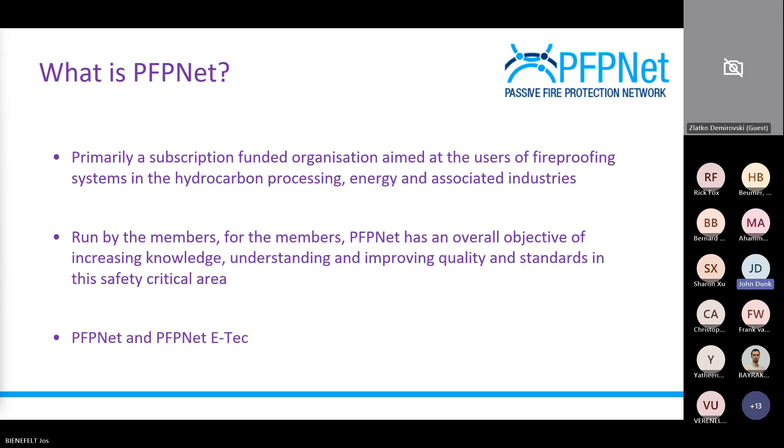Today's meeting is really to talk about tunnel fire protection. Some time ago, PFPNet recognized the severity of oil and gas fires compared to those that occur in tunnels, and we formed the Tunnel Fire Protection Group. This is currently chaired by Kees Both of ETEX. It's a small group within PFPNet, but one which is looking specifically at tunnel fire protection. So far, that group has developed several documents addressing fire protection in tunnels, the most recent of which is the guidance document we will be presenting throughout this webinar.

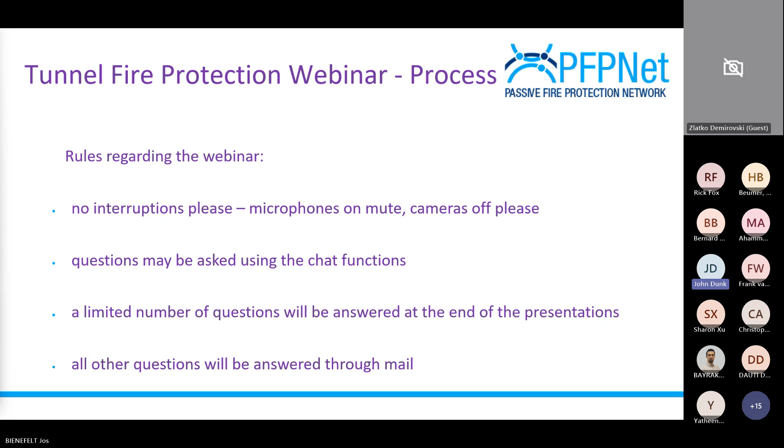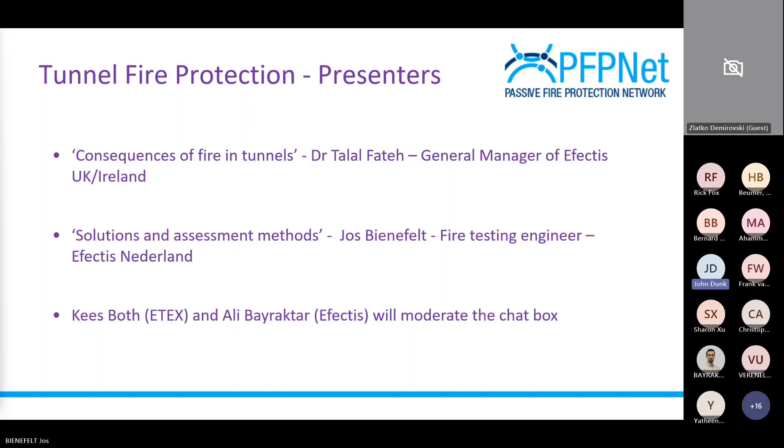So kicking off, we have consequences of fire in tunnels, which Talal's going to present. Then solutions and assessment methods, which Jos is going to present. Kees Both and Ali Bayraktar will be moderating the chat box, so those guys are going to be doing a good job for us today. Right, so that's me pretty much completed. We can go into the presentations if we want to start, please.

Good morning, everyone. My name is Talal Fateh. I am the manager of Efectis UK. Before starting the presentation today, I just want to take 5 minutes to present who Efectis is, what we are doing, and why we are here today.

20 years ago, the Dutch Public Research Center, TNO, with the French metallic construction company, CTICM, created a company named Efectis, dedicated to fire safety. We are based on our testing culture, so we try to test everything we can. However, testing is not enough, so you need to have a look at fire engineering and certification, including inspection and approval.

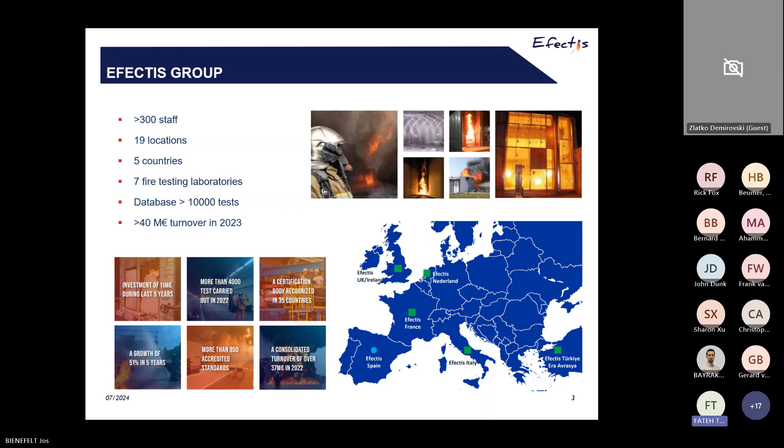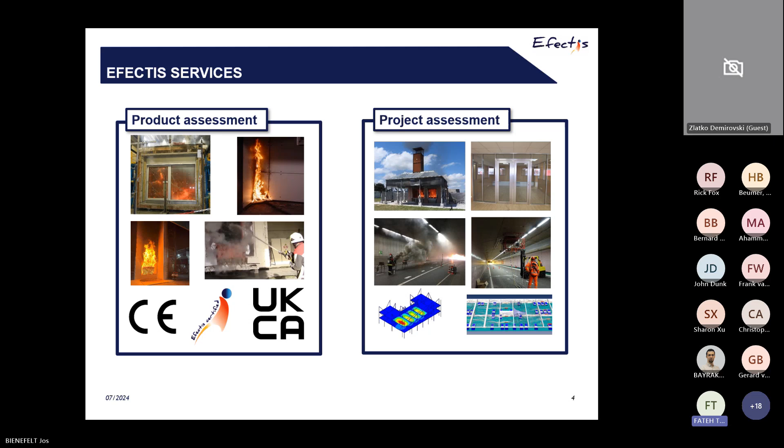To summarize our service, we are working at 2 different scales. The first one is the product scale, where we work with our client to assess the fire performance of the product and provide the relevant certification, such as but not limited to CE marking, UKCA, or our voluntary system Efectis Certified. However, we can also work at the project level, where we assist a system to understand the fire performance of a system in real life or in real application.

As I mentioned, we are a testing and fire engineering company. We cover reaction to fire, fire resistance. Sometimes we need to do special tests, which can be large scale or adapted tests. We are able to provide certification, and also work in fire engineering, and we have teams to cover inspection and expertise.

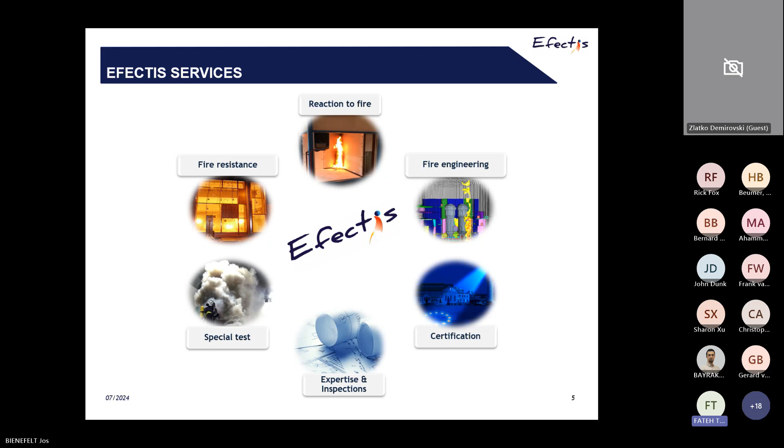As I mentioned, Efectis is dedicated to fire safety. However, our market is not limited to public buildings and high-rise buildings, but also we are working in nuclear plants, transport area, infrastructure, oil and gas.

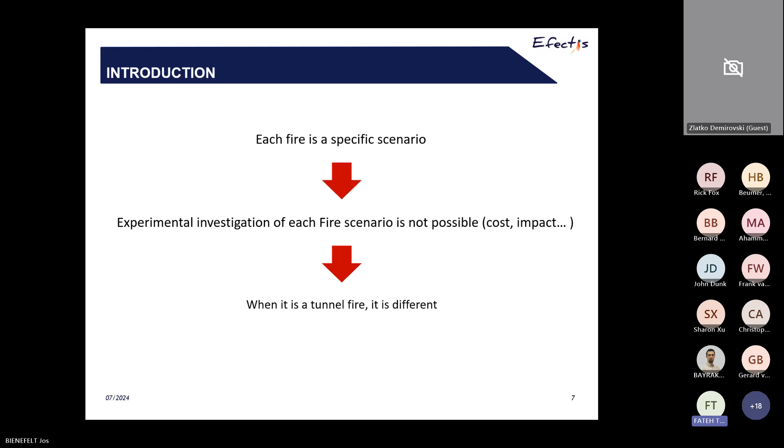If we would like now to come back to our topic, let us all agree that each fire is a specific scenario. We cannot, unfortunately, investigate every scenario. The problem today, if we are talking about the tunnel fire, I don't want to use the word complex. I will use the word different. Why is it different?

It's different because I have ventilation, oxygen is available. The location of the ignition can change across the tunnel. The dimension of the tunnel itself can be different from one to another. If we're talking about the fuel load, this can be a few megawatts if we have a fire started from a car, where it can be hundreds of megawatts when we are talking about a lorry or maybe petrol tanks.

We have several issues that can happen in the tunnel and only in the tunnel. For example, we can have backlayering, where the smoke stagnates at a certain level in the tunnel. We can have what we call the moving fire, if we are talking about a train that has a fire and that train keeps going ahead across the tunnel. And of course, the tunnel fire has consequences during the accident and after.

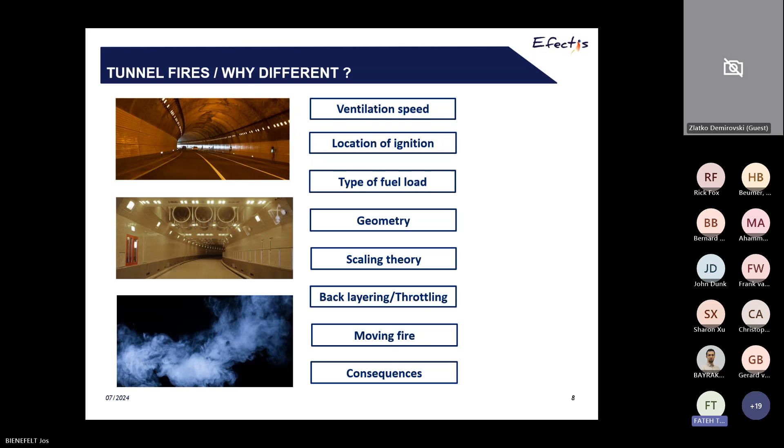So, to respect the time dedicated to me today, I will just select a few items to present the consequences we may have during a fire in the tunnel. I will try to present briefly a few items. Of course, you may have something extra, but the objective of today is not to cover all of them, just maybe to have a quick view of what can happen during this type of accident.

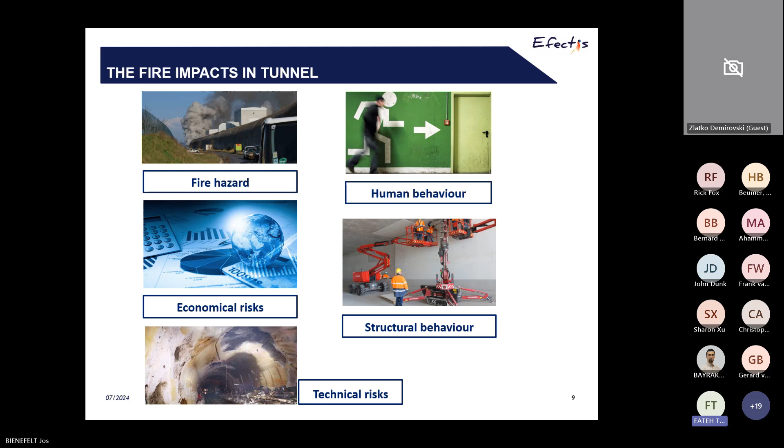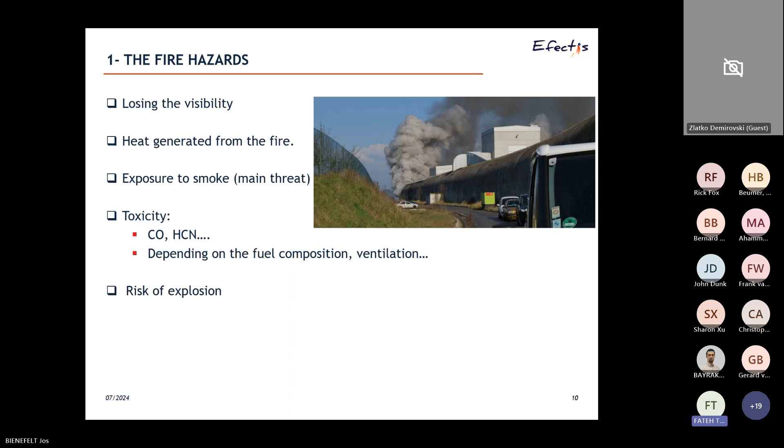So if we start with the hazard from the fire, as you can see in the picture, a fire in a tunnel will generate a lot of smoke and a lot of heat. As we know, smoke is toxic, and we know that a lot of gas is generated, such as CO, HCN, etc. But the gas itself can be different from fire to fire due to the variation of the scenario, like fuel and ventilation. And also we should not forget that we have, all the time, a risk of explosion.

One of the main issues we have in the tunnel is that we may need to evacuate a large number of people involved in the fire. The issue is that when we are doing a training or fire drill, the evacuation happens 100% successfully without any problem. The issue is that when we have a real fire scenario, we act differently. We will act differently when we are alone, and also we will act differently when we are in a group. This can lead to increased evacuation time.

Increasing the evacuation time may create more probability of having more accidents and injury, and increase the fatality of that accident. So we need to pay attention to how we evacuate all these people without having any problem. And sometimes the people themselves create another accident, or maybe enhance the fire to spread during the fire in the tunnel by doing the wrong things.

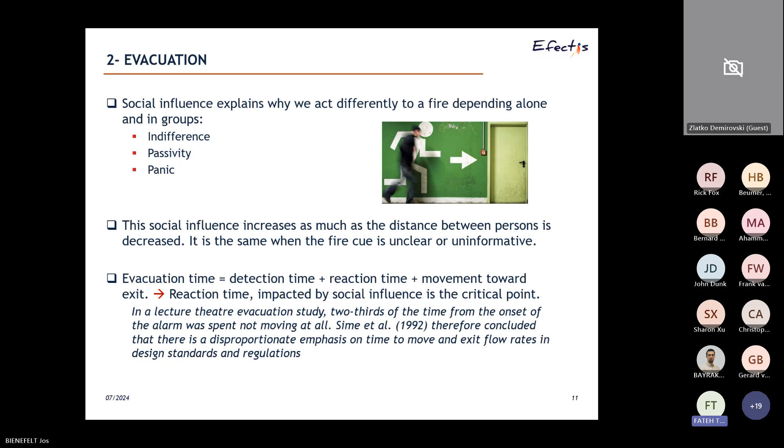Of course, a fire may lead to losing the power system in the tunnel or the surrounding area. What it means is we may lose the lighting, the ventilation, communication. And also we are losing the function of that tunnel. It can lead to significant traffic impact. And also we may need to close the tunnel, not only during the accident, but also we need more time to investigate and understand why this happened, and later a significant time to repair it.

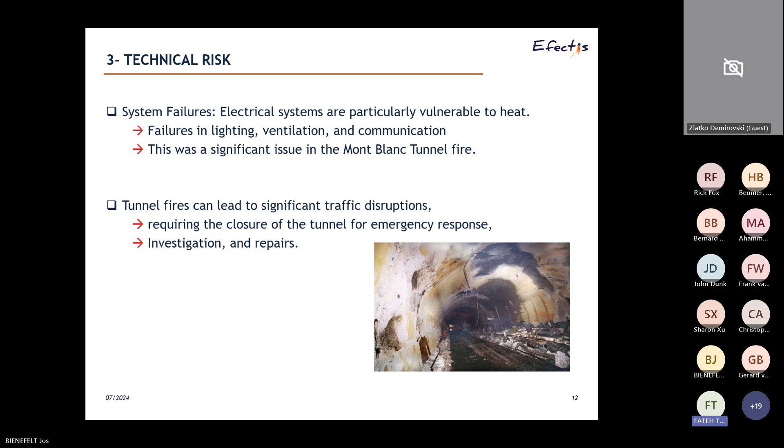So if I'm talking about the reparation, we can cover the economic cost, but also we should not forget that during the maintenance phase, we need another solution for our needs, so logistics can add an extra cost. We should not forget the environmental cost - we are talking about the pollution of the air and of the water. Sometimes when we have a lot of severe fires happen in the tunnel, people may lose confidence in the safety of the tunnel infrastructure.

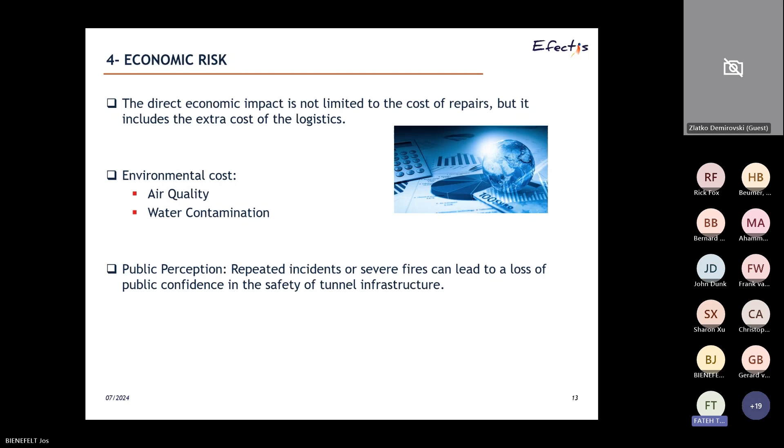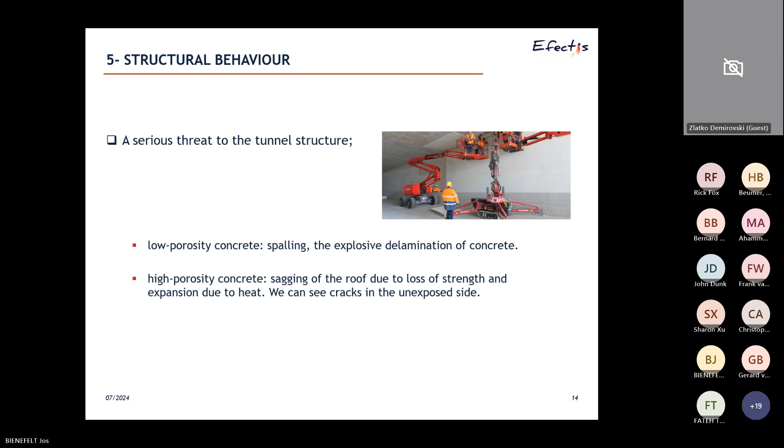And the most important thing is the damage to the structure of the tunnel. One of the main structural problems in a tunnel exposed to fire is the serious damage caused by explosive spalling of the concrete.

How can we reduce all these negative things happening? Of course, it's not limited to good design, good detection, enhanced maintenance, inspection, and training the staff of the management company that operates the tunnel, but also, as we are talking today, about passive fire protection.

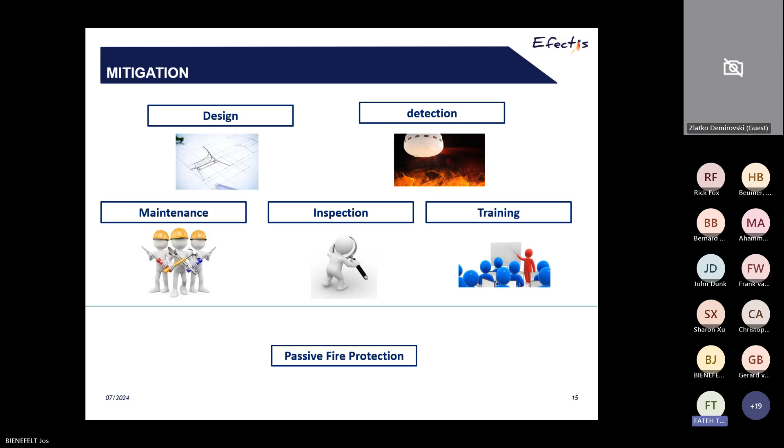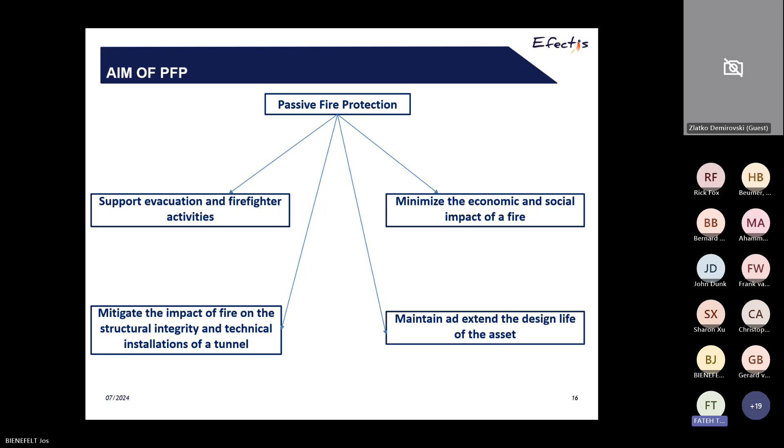So the next one, just... why passive fire protection? Because passive fire protection will support evacuation and firefighting activities, and also will reduce the impact of the fire on the structure, and protect the technical installations of the tunnel. This leads to minimizing the economy and cost of the fire, and gives us more life cycle for the assets.

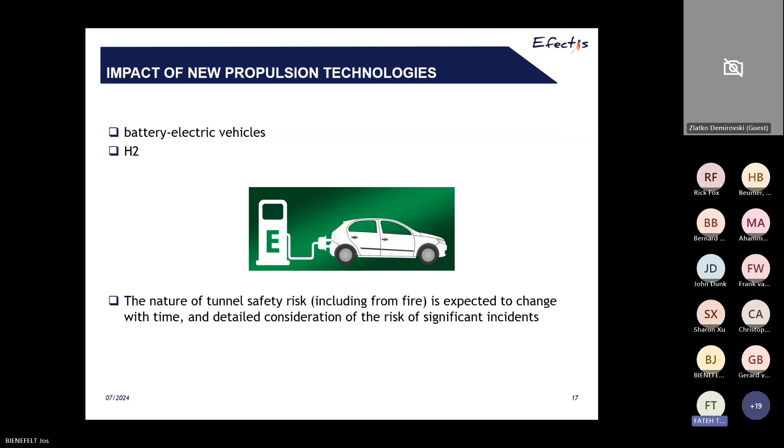Before passing the presentation to my colleague, I would like to raise another issue coming from new technology - today we are talking about hydrogen and batteries, and more complex designs in tunnels. All of this is changing the safety risk, including fire risk in tunnels, and this needs to be considered in any further investigation. I hope I respected my 10 minutes - sorry if I used more. So I will leave it for you now. Thanks.

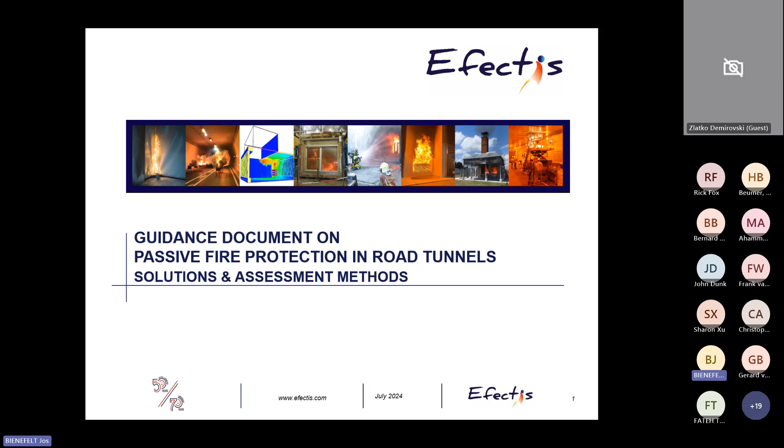My name is Jos Bienefelt, and I'm a project leader at Efectis, the fire engineering department. My main involvement is in fire resistance of concrete structures, mainly tunnels, and also protection of these concrete structures. I'm a co-author and editor of the Efectis R0695 procedure for testing of tunnel linings. I'm also co-author of the guidance document. This is my email address and telephone number.

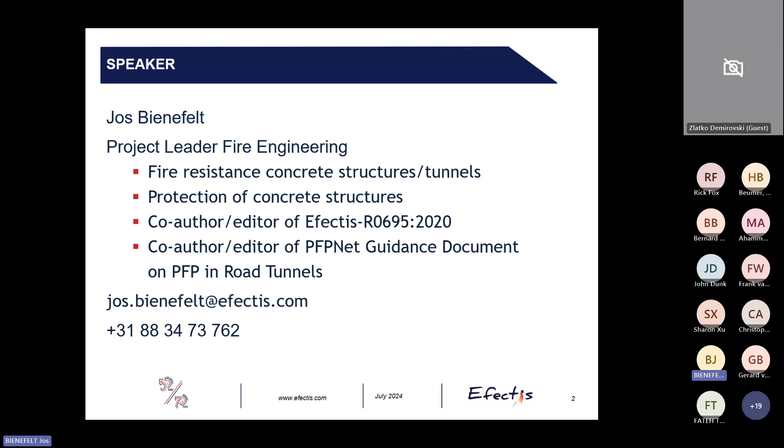The intent of the guidance document is to give a primer for those not familiar with PFP in road tunnels. For PFPNet, the interests are that tunnel fires are severe and similar to industrial fires - fires that other PFP members are familiar with. And the hazards are also becoming more similar, for instance hydrogen and batteries.

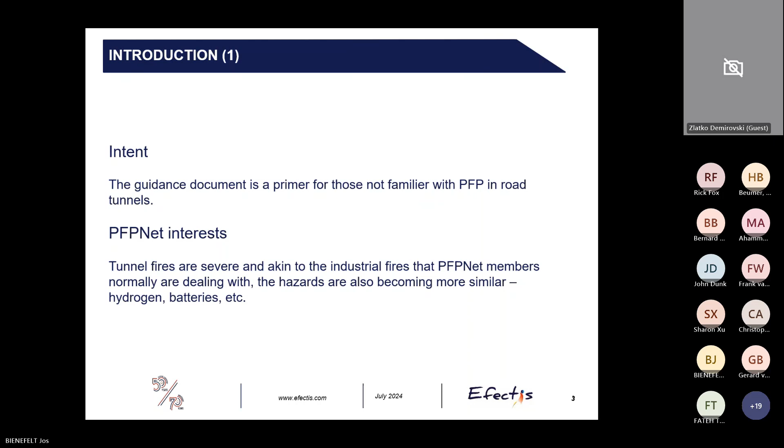The scope of the guidance document is at the moment only road tunnels, but other tunnels are also considered for future developments, for instance rail tunnels. The focus is mainly on tunnels made of concrete, but part of the document may also be applicable to other building materials. The focus is also on protecting the main load-bearing structure of the tunnel, and focuses on added-on PFP. Only legislation from the UK, France, and the Netherlands is included in the guidance document.

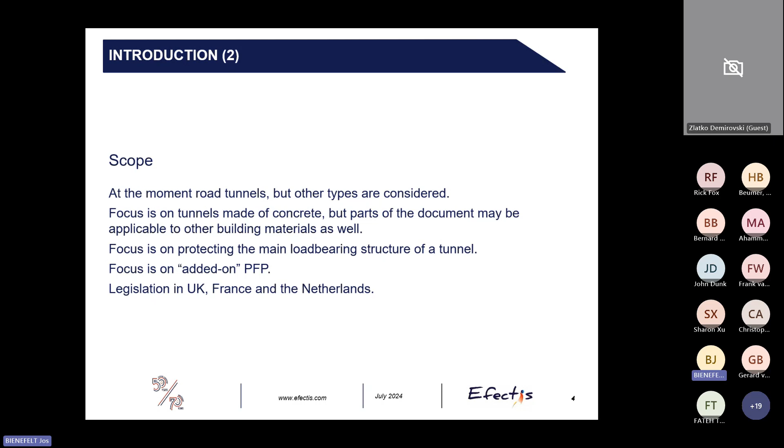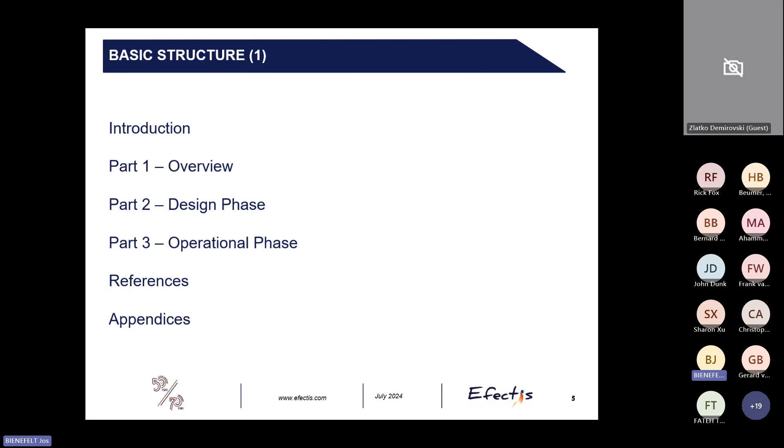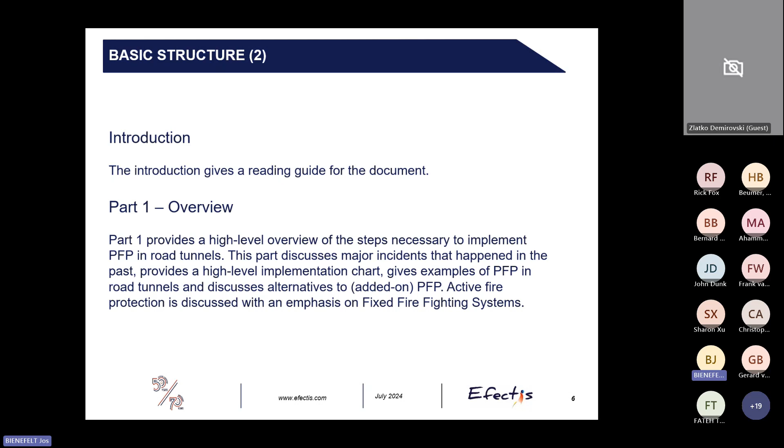In part one, overview, a high-level overview is given of the steps necessary to implement passive fire protection in road tunnels. It discusses major incidents, gives a high-level implementation chart, gives examples of PFP, discusses alternatives, and also discusses active fire protection with an emphasis on fixed firefighting systems.

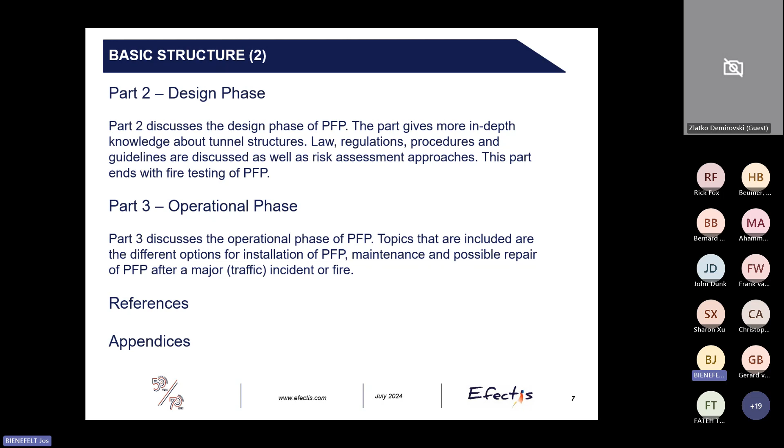Part 2, design phase, discusses the design of PFP, gives more in-depth knowledge about tunnel structures, relevant regulations, procedures and guidelines, as well as risk assessment approaches, and this section ends with testing of passive fire protection. In part 3, the operational phase is discussed, which includes installation, maintenance, and possible repair.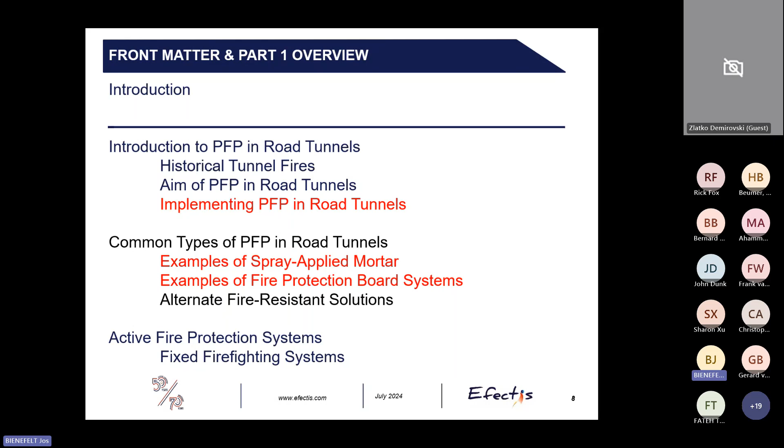So for this webinar, I will focus only on implementing PFP and examples of passive fire protection in tunnels from part 1. So let's start with implementing passive fire protection.

This is the implementation chart we've made, with 7 steps you should take for implementing passive fire protection in road tunnels. It starts off with identifying key tunnel characteristics, for instance if it's a tunnel under open water or only a land tunnel.

The next step would be to check relevant law and regulations. The next step is to perform a risk assessment study, and based on the risk assessment study, a fire protection system can be chosen. That system has, of course, to be tested for conformity, and if it fails, then you are back to step 4.

Well, if a system has been chosen and it conforms to the specs, you can go to installation, and after that, of course, maintenance.

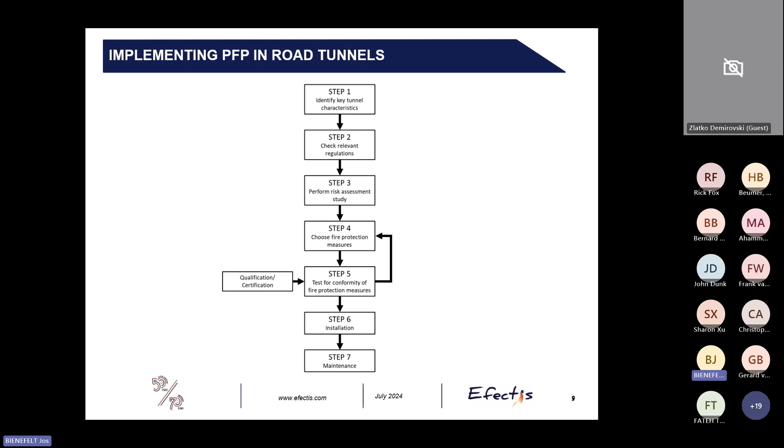Now I want to discuss the most common types of passive fire protection used in road tunnels. Mainly two types exist: based on spray applied mortar or based on fire-resistant boards. At the time of writing this guidance document, I'm not familiar with intumescent coatings in use in tunnels, however I know that developments are being made.

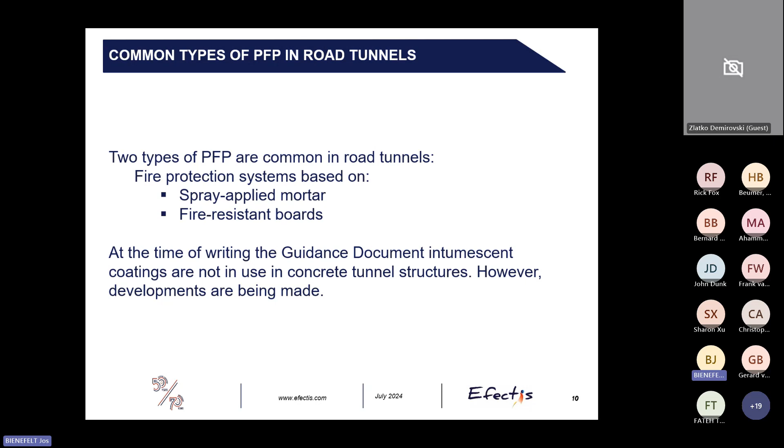All right, so let's start off with an example of spray applied mortar. This is a picture of spray... sorry, we'll continue. So this is an example of spray applied mortar in a tunnel. You can see here it's applied to the wall, but it's also applied to these beams on the ceiling.

The beams on the ceiling still have the rough surface that shows after applying the spray applied mortar, but on the wall it's nicely troweled to cut down the unevenness and give it a smooth appearance, and it was also painted.

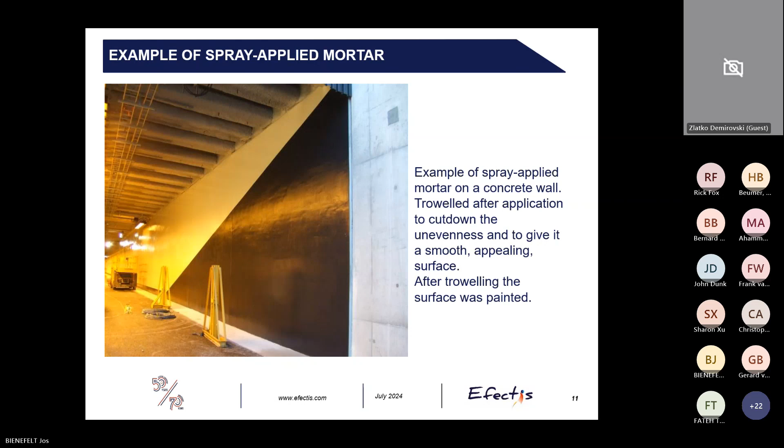This is a basic system in that the joints are butted together and it's placed directly against the concrete. Such a system can also be painted to make it more appealing.

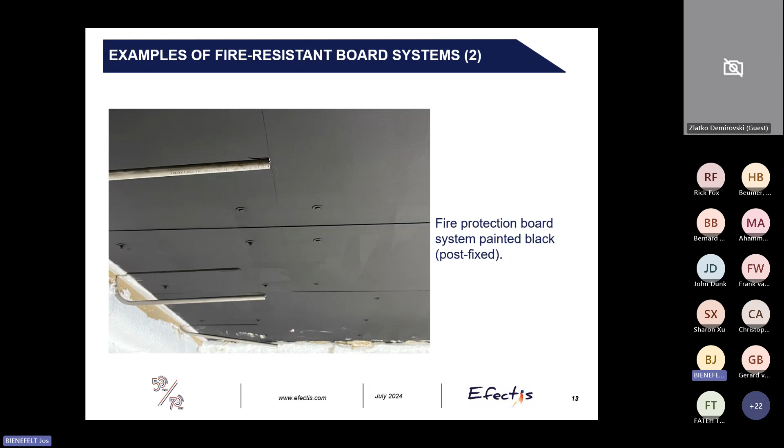The board system may also be applied to a bored tunnel segment, as used for TBM tunnels. In this case, a faceted system is used, so boards with a small width are used, and this system is also placed at the joints on backing strips, and it's also attached with stainless steel anchors.

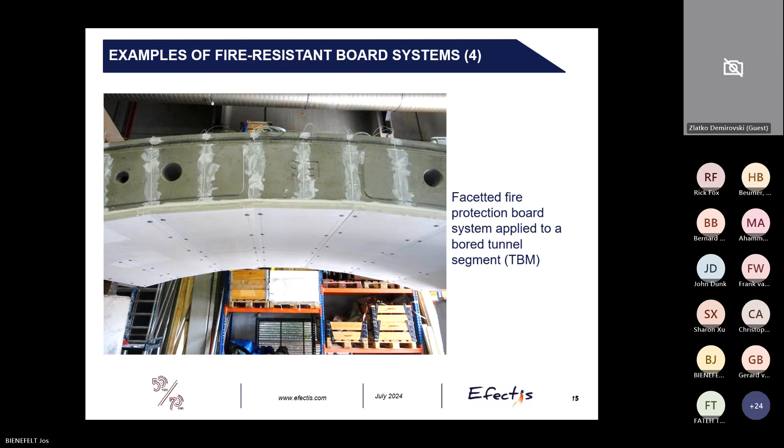Another variety you see in practice is that the fire protection boards are installed onto a steel structure. In this case, because the back of the board is not in touch with the concrete, it doesn't work as a heat sink, so these boards are usually quite hot at the back during fire. As a consequence, sometimes a thicker board is used in practice.

So now we will continue with part 2, the design phase, and for this webinar I will be discussing testing of passive fire protection.

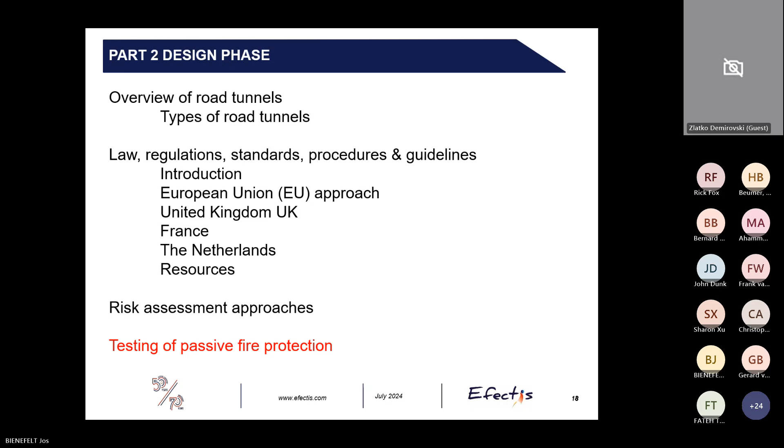So testing may be divided into the following tests: reaction to fire tests, which are a main concern in the beginning stages of a fire; fire resistance tests; and other tests such as frost-thaw cycle tests, fluctuating air pressure tests, and tests to check resistance to chemically aggressive environments. Exposure and aging tests are also mentioned in these EAD documents.

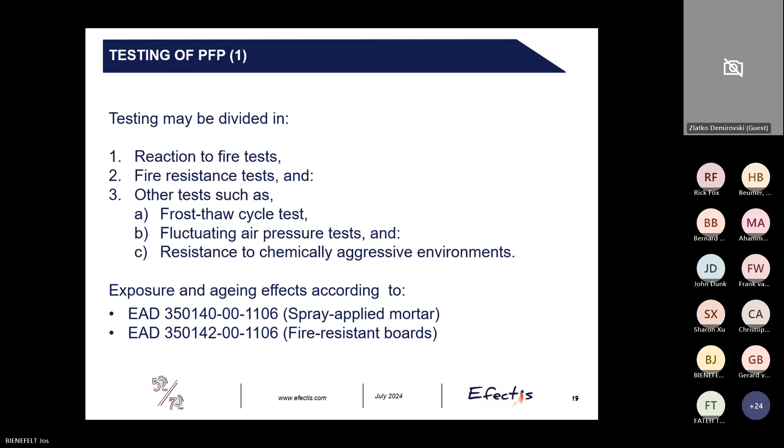On the European level, there's no harmonized fire resistance testing standard or classification system for passive fire protection in road tunnels, in other words, testing at the high temperatures expected in the most severe tunnel fires. So every country arranges this on a national level, and the guidance document describes the procedures for France and the Netherlands, since there's no specific UK procedure at this moment.

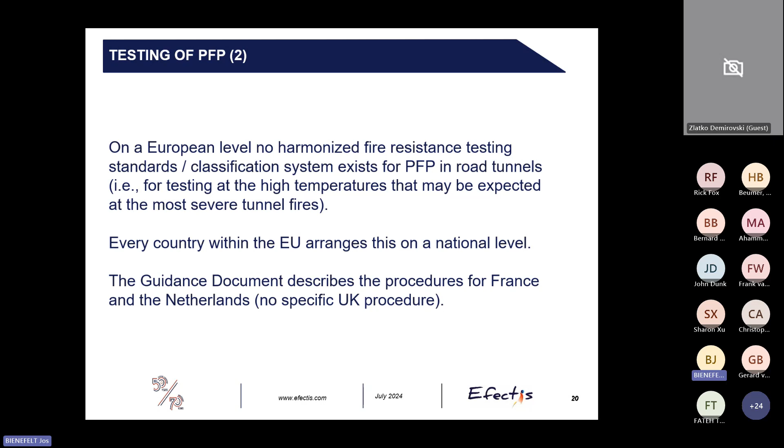But before we go there, let's check the most common fire curves. For buildings, the ISO 834 standard curve is normally used. Comparing that to curves used in tunnels, for instance the RWS fire curve, we see a much higher peak temperature of 1350 degrees Celsius. Also importantly, tunnel fire curves rapidly rise in temperature in the beginning stages; for instance, the RWS fire curve reaches more than 1100 degrees Celsius within 5 minutes. That has a big impact on the concrete tunnel structure, and because of the rapid rise, it might induce fire-induced spalling.

So in the Netherlands, the RWS fire curve is used. In France, the HCM fire curve is used. And I've also included two other fire curves that come from Germany, the RABT 30 and RABT 60 fire curves.

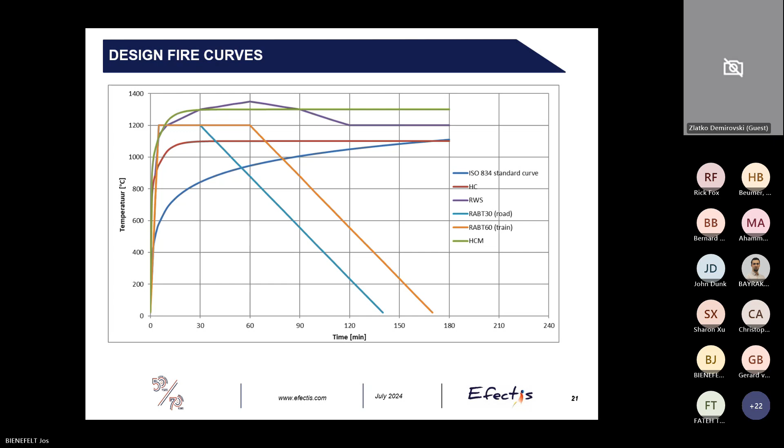So testing fire protection, passive fire protection in France. The demand there is A2S1D0 for reaction to fire.

And for determining the fire resistance, CETU has published a guide called Passive Fire Protection Systems, Justification of Performance for Road Tunnel Structures. If you Google this, you can find it on the website of CETU and download it for free.

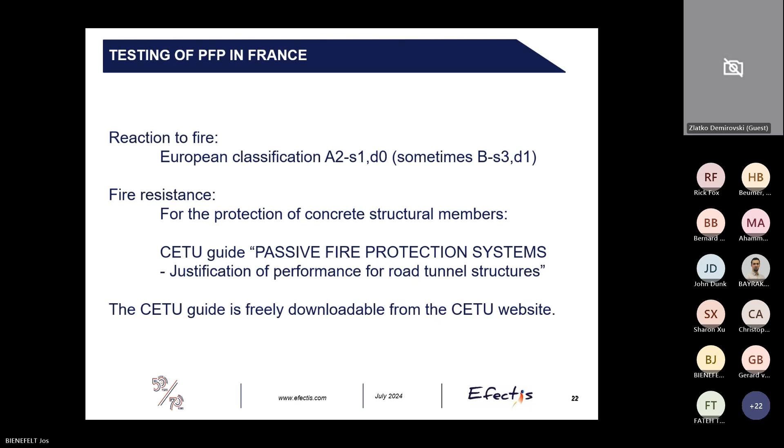The CETU test is actually based on a European test standard, EN 13381-3, but it substitutes the standard fire curve for the HCM fire curve. And it describes more instrumentation than the European standard.

So the CETU guide only describes a method to determine the characteristics of passive fire protection, but it doesn't focus on the spalling properties or other fire properties of the concrete structure. Those are not considered.

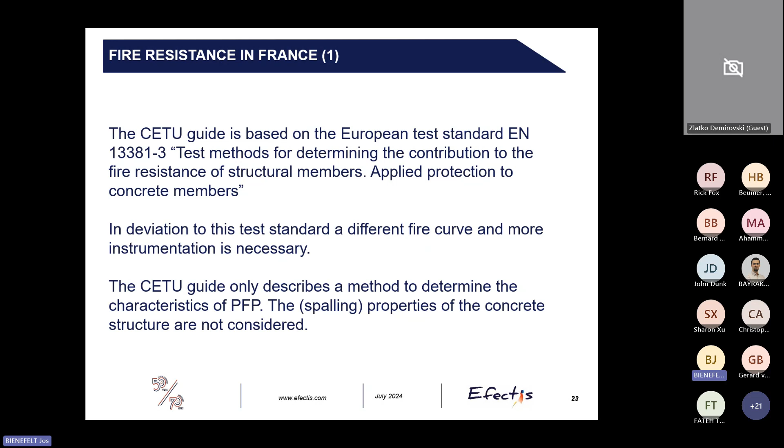So based on the required safety level in the tunnel, a different fire curve is chosen, or actually the length of the fire curve is different. If you go to the highest safety level, in this case N3, you should do a 4-hour test on the system, of which the first 2 hours are the HCM fire curve. And after 2 hours, it picks up the standard fire curve to the end, to 240 minutes. There's an overlapping period between those two fire curves because you have to go down in temperature, which cannot be done in one big step.

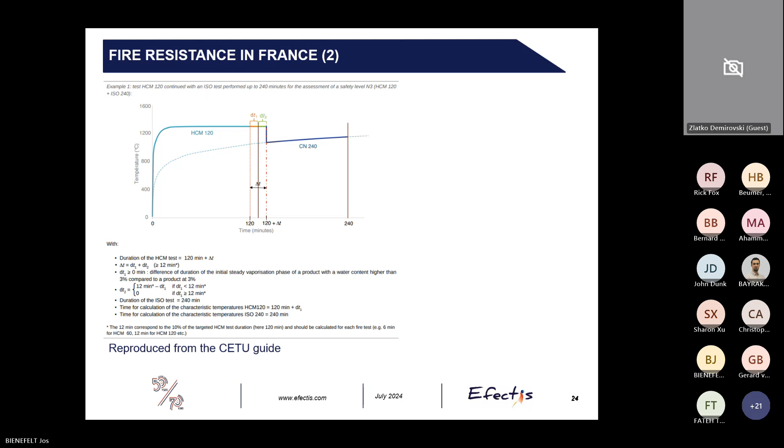So a couple of remarks about this test procedure. For this test, there is tensile stress in the lower reinforcement bars of the concrete slab. There's no furnace pressure criterion. Structural failure of the PFP system is not allowed. And fire resistance is based on a maximum characteristic temperature and exposed surface of the concrete.

What is also good to mention is that this definition of characteristic temperature, which is taken from the European standard, differs from the definition that's used for the Dutch case, so differs from the definition used in the Efectis R0695 procedure.

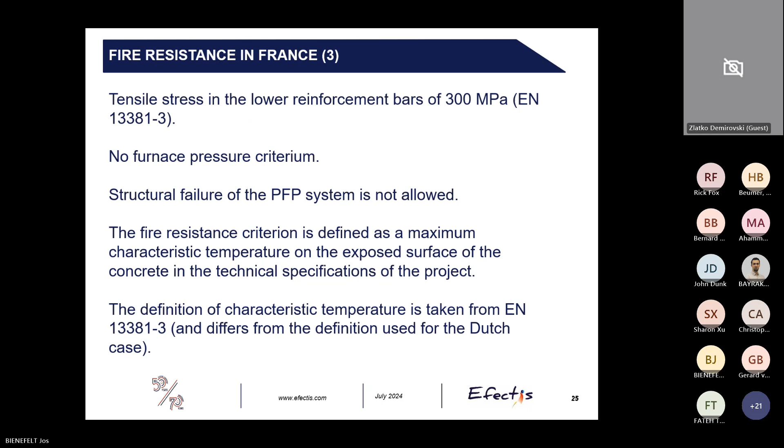Continuing with the Dutch case. In the Netherlands, the reaction to fire should comply to BS2D2. And for fire resistance, Efectis R0695 is used. This one is also freely available from the Efectis website.

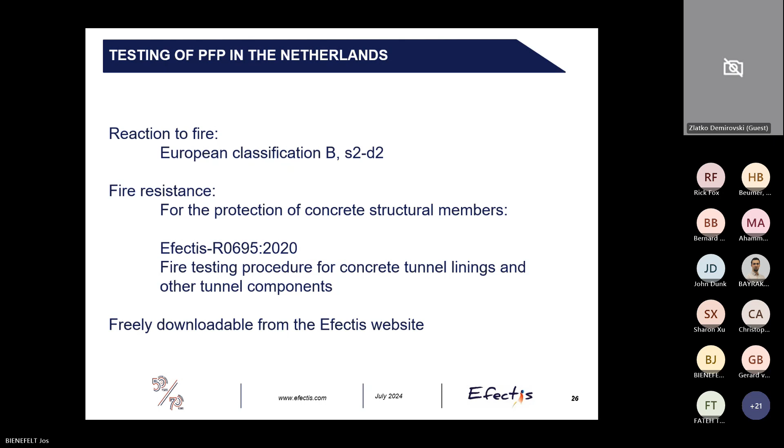This procedure describes two kinds of tests, a spalling test and a thermal insulation test. For the spalling test, the concrete structure is also considered and should be representative of the structure that is used in the actual tunnel.

So for the spalling test, the spalling behavior of the concrete is important. For the thermal insulation test, that's not the case, and it's solely a test to determine the fire resistant properties of a fire protection system.

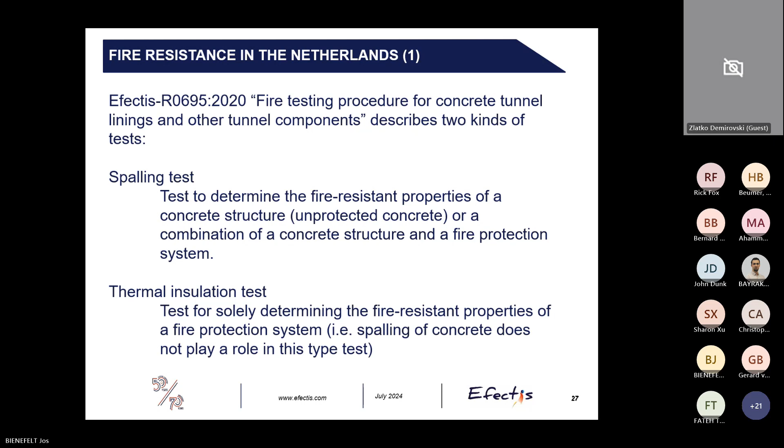So for a spalling test, the heated area is a minimum of 5 square meters for unprotected concrete and 8 square meters for protected concrete, so concrete protected with a passive fire protection system. And the concrete test slab should have a thickness the same as in practice, but let's limit it to 40 centimeters.

And for the thermal insulation tests, there are actually two types of tests, a large scale test and a medium scale test. The large scale test should again have a minimum area of at least 8 square meters, and the medium scale test has a minimum area of 1.15 by 1.15 meters.

So in the latest version of the procedure, the medium scale test is only intended for R&D purposes. So actually, if you want to know the fire resistant properties, you should do a large scale test.

Behind the boards, thermocouples are placed to measure the interface temperatures, so actually temperatures of the concrete surface behind the boards. And also the temperatures are measured at the joints between boards. Special joints, such as the T joint and the X joints, have a separate thermocouple to measure the temperature there.

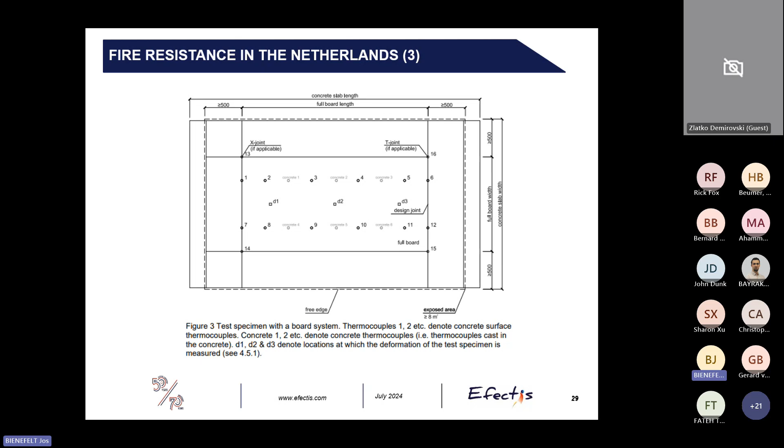So for the spalling test, the compressive stress level in the concrete shall be representative of the actual conditions in the tunnel. The reason for that is that the spalling behavior of concrete is influenced by compressive stresses. Also, the concrete mix, reinforcement, etc. should be representative of the actual design.

For the thermal insulation test, only the thermal properties of concrete are considered. So for this test, there is a furnace pressure criterion, an overpressure of 50 pascals. And in this case, again, structural failure of the passive fire protection system is not allowed.

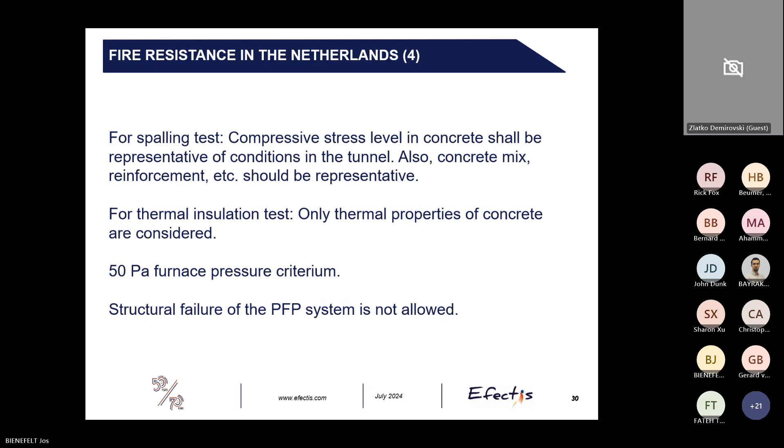So in the Netherlands, the following requirements are applicable. For the concrete surface, the temperature may not be higher than 380 degrees Celsius and spalling may not occur. And for the first structural reinforcement layer, the maximum temperature is 250 degrees Celsius.

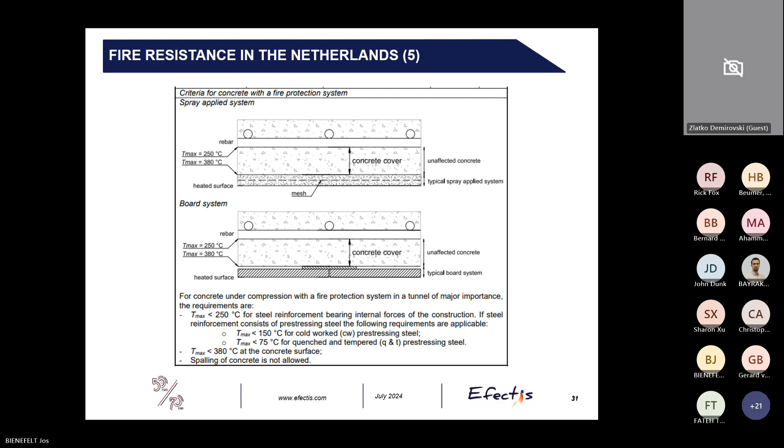So now I would like to give you an example of a test on a concrete slab, a test that was unprotected, meaning it didn't have a passive fire protection system, and no PP fiber was added to the concrete mix. This slab has a length of 5 meters, width of 2.4 meters, and a thickness of 40 centimeters. The actual heated area has dimensions of 4 meters by 2.4 meters.

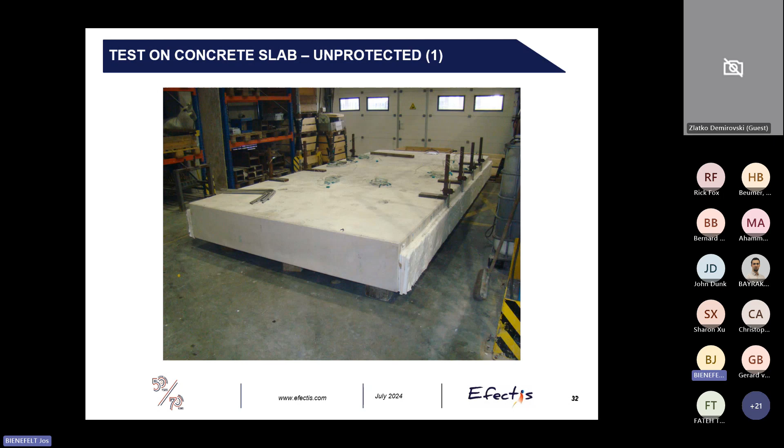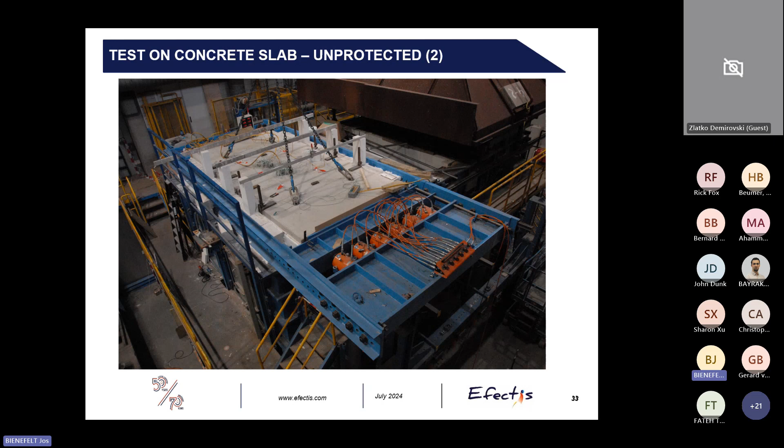This slab was loaded to induce compressive stresses. It was loaded to 10 megapascals on the heated side using this blue loading frame, and it's placed on top of the Efectis large fire resistance furnace.

This specific sample had a concrete cover of 70 millimeters. So as a minimum, 70 millimeters has been lost already in 20 minutes, but the test time is actually 2 hours. So you can imagine if we would have tested longer, we would have gone through this slab at some point.

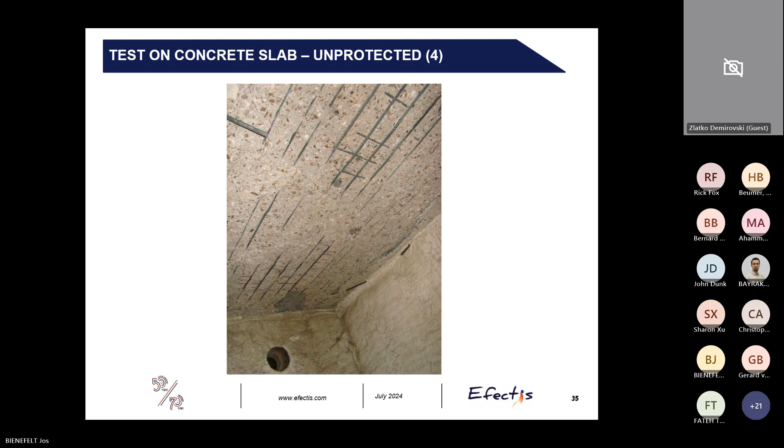This is another picture of the slab hanging in the air.

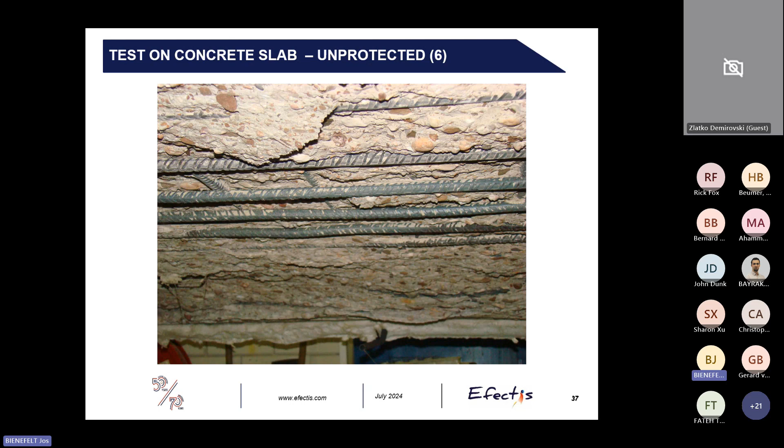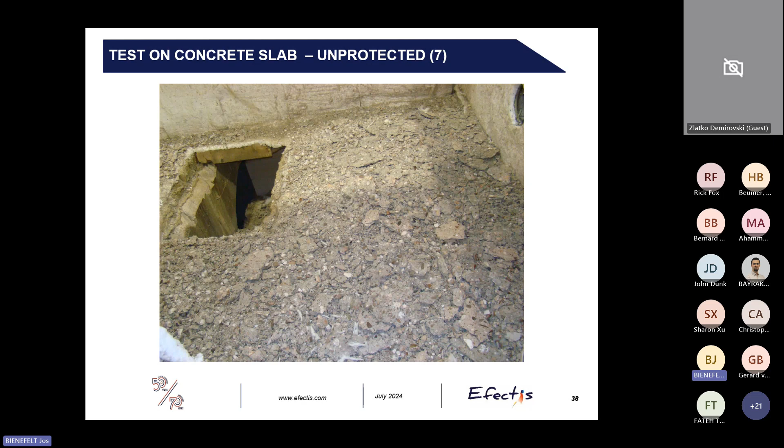But I think these pictures clearly show that for most concrete mixtures, and especially prefabricated concrete, special fire protection is needed to prevent severe spalling of the structure.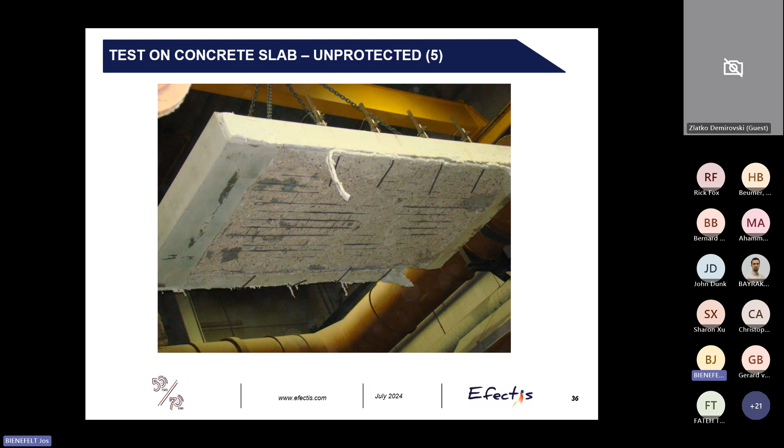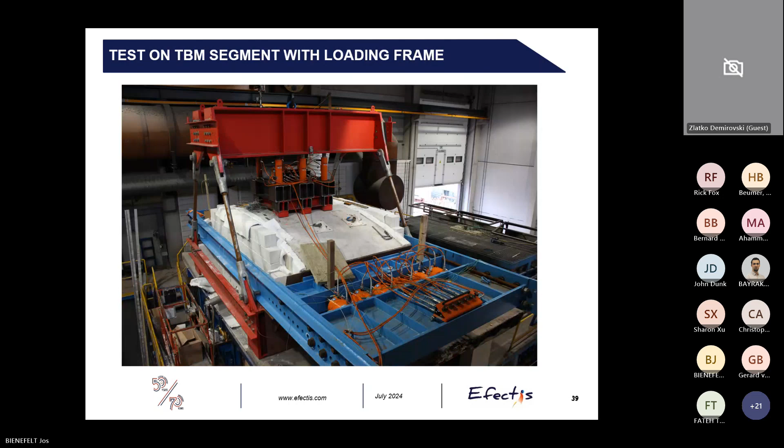We will continue now with a special kind of testing that Efectis has done many times: testing concrete structures on site in an actual tunnel. For already existing tunnels, it's not possible to bring concrete to the lab, so for that reason we go to the tunnel with our furnace.

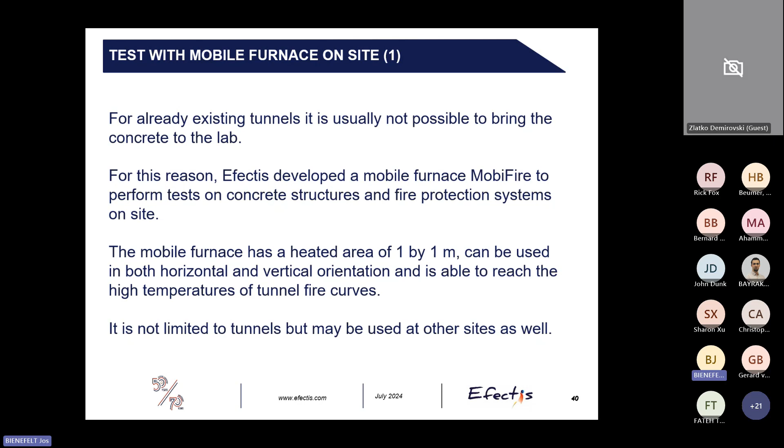Efectis developed a small furnace for that, which has a heated area of approximately 1 by 1 meter. It can be used for testing on the wall, but also on the ceiling of a tunnel, and is able to reach the high temperatures of the tunnel fire curves. The mobile furnace may also be used at other sites, not only in tunnels.

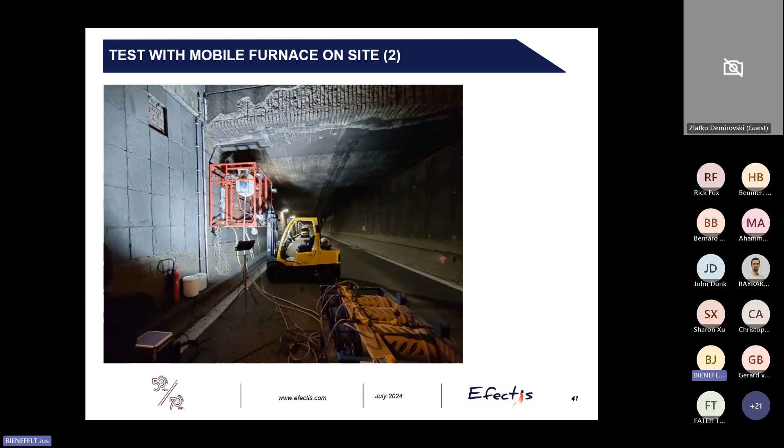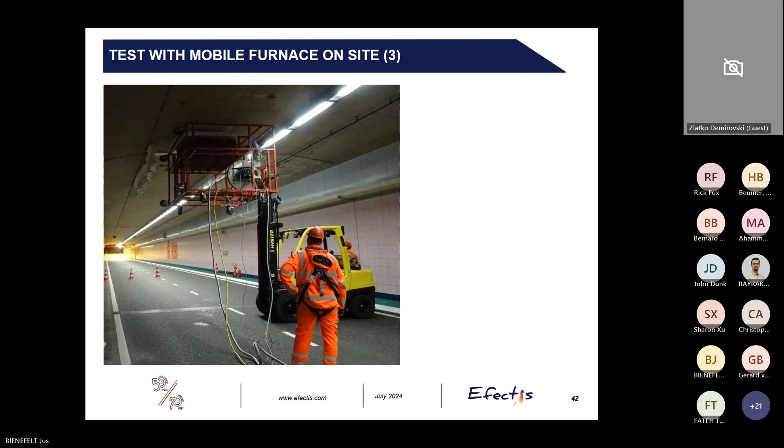So then we come to the last part of the guidance document, which includes installation, repair, and maintenance. There's also an appendix which goes into more detail about the behavior of concrete under fire conditions, but for this webinar we will not discuss these subjects.

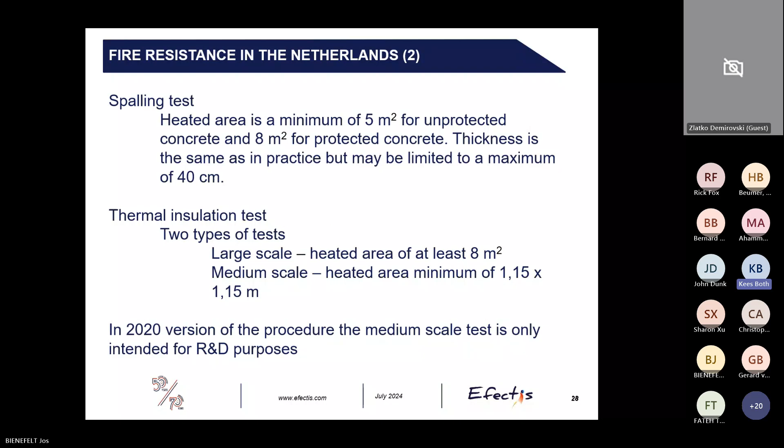Oh indeed, yeah, I understand you now. So maybe I can go back a bit to this picture. Let me check. And whilst you're looking, you may also want to expand on the difference between the modulus of elasticity of the boards and the concrete.

So it's actually referred to this one, right? So indeed, at joints between tunnel sections, you should design for that, of course.

At these points, a different design is used, also for different reasons. The first reason is that these dilatation joints are more vulnerable to high temperatures. From what I remember, the temperature should not be higher than 70 degrees Celsius normally behind the boards.

So usually you need more insulation at joints in tunnels. And also the board system should be designed in a way that differences between the tunnel sections can be accounted for. I think there are overlapping boards there that can move with respect to each other and still cover the seal that's behind it.

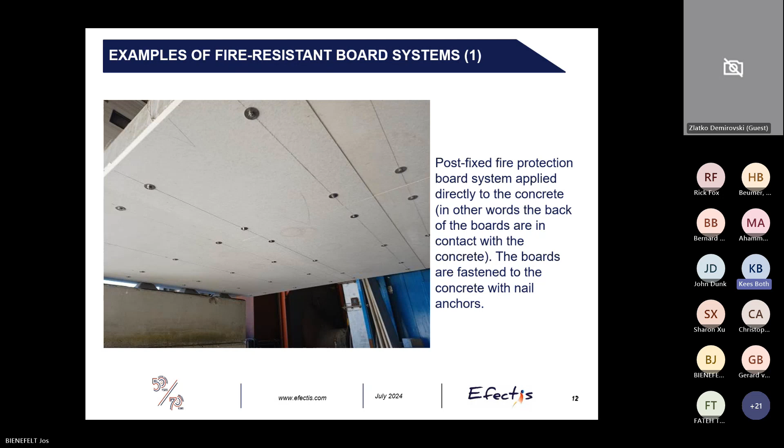I think that answers the question. But yes, in general, I would argue that there may not be specific requirements for the decorative boards themselves, fire related. So if they would fall off during a test, it wouldn't necessarily be a criterion, right? No, indeed. There's no special criterion for the decorative layer.

Okay, the next question again is from Adia from RWS. What information can we get from a spalling test? Can we only conclude whether the concrete is spalling?

Yeah, I think that's also a good question. So if you would test unprotected, so no passive fire protection system, no thermocouples on the concrete surface, I think such a test will only give in the end if concrete spalls, or if it not spalls, or if it spalls not as heavy, so you would have a certain spalling depth that might still be acceptable. But it doesn't give much more information than that.

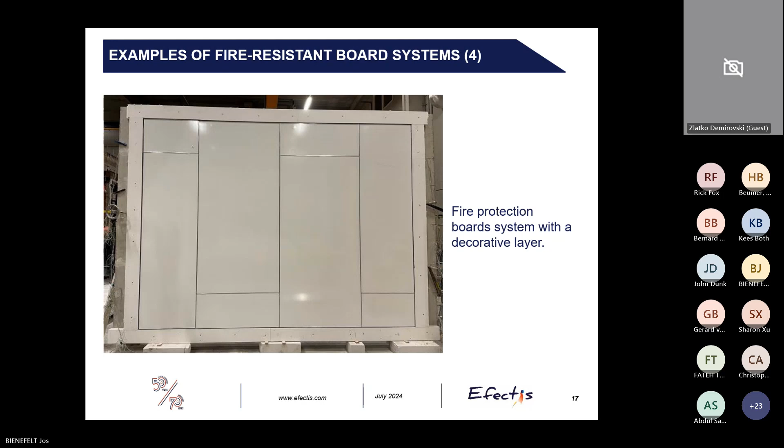Okay, thank you, Jos. We're just shy over the hour, so I suppose we go to the concluding remarks, and thanks for those who posed the questions. We'll try to put the Q&A session in writing as well on the PFPNet website, I suppose, John, but maybe back to you to see how we handle this.